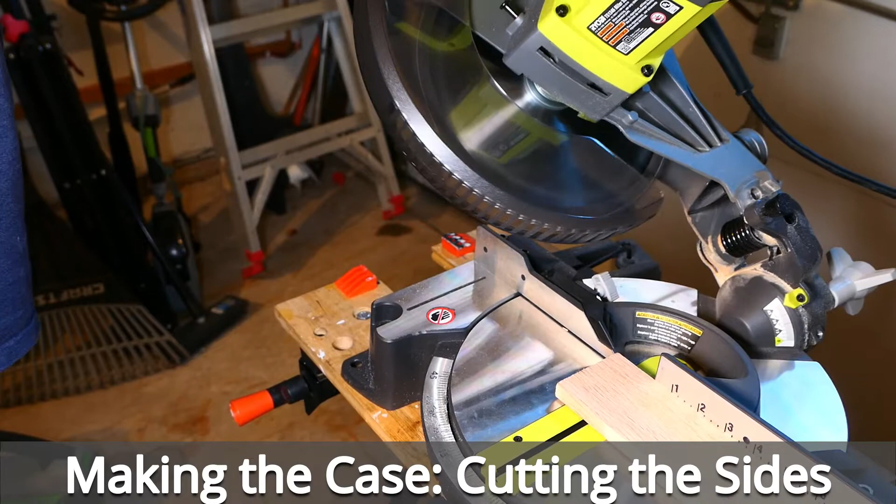So I started off with cutting a frame for the Bayes calculator box. First just do the end cut to get the first 45-degree miter cut. Measured 322 there, along here. And then I used my measurements pretty close to it, to get the bottom of that piece miter cut.

So just ran through the 4 pieces I need to cut like that, making sure they're pretty much exactly the right length for fitting the Bayes calc poster and the panel inside the box. I had about 1mm gap planned on each side of those things, so hopefully I'm getting this close enough that everything fits in.

And then there's one vertical, or 2 vertical cuts to do for the piece that runs across between the panel and the poster.

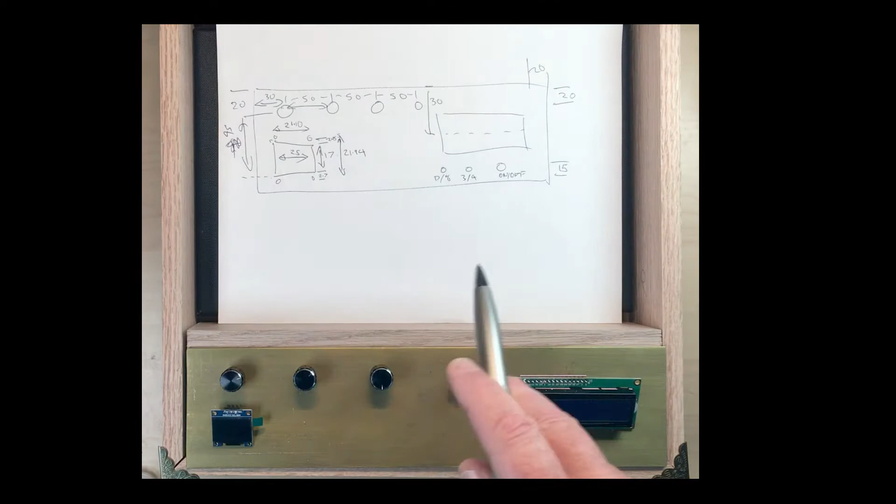Okay, had a better go at working out the layout here, where the knobs go and the OLEDs and the LCD goes. So I got some measurements down here. So 30mm to the first knob, then 50mm between each knob, 45mm from the knob down to the bottom of the OLED should work, and then this worked out about 30mm down to the center of this panel.

It gives me a bit of room, so if I have to cut off a little bit off the edge, I can do that. So the next thing I need to do is start center punching this and drilling probably that hole and work out how to cut out the square hole.

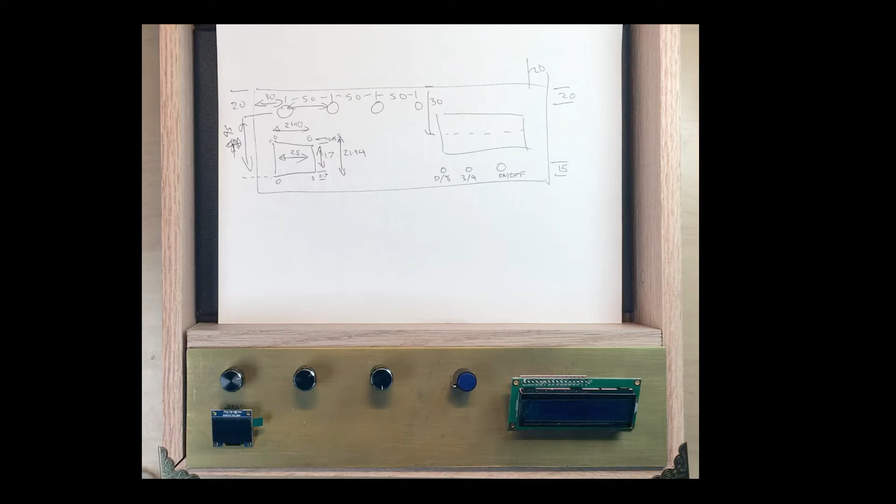I'm probably going to do a 3D print to have a mount in there for that, and also surround whatever I cut out for the hole, because it's probably not going to be absolutely straight. So I'll put a little frame around the hole with a 3D print. We'll see how that goes.

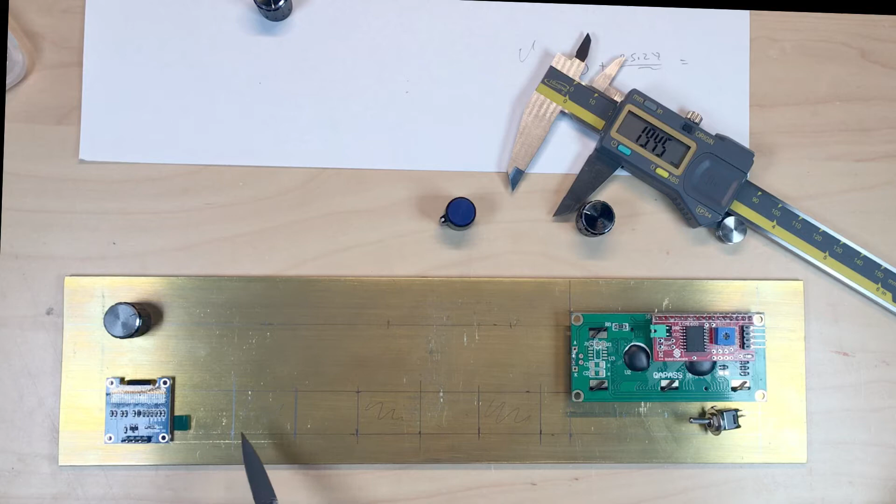So I added some markings here, just used a pencil because I can rub it all off. I'm going to clean up the front of this brass plate, but here's with my 30mm in, 50mm between each knob, and then laid out for the OLED holes.

These scribbled on areas will be ones I cut out, and then the LCD should fit up there and be able to fit at least 3 switches underneath, which I think I'm going to need for setting percentage or decimals, setting it to 4 knob or 3 knob input, and an on-off switch. So I think that there'll be enough room, and then I can cut a millimeter or so off the end if I really need to.

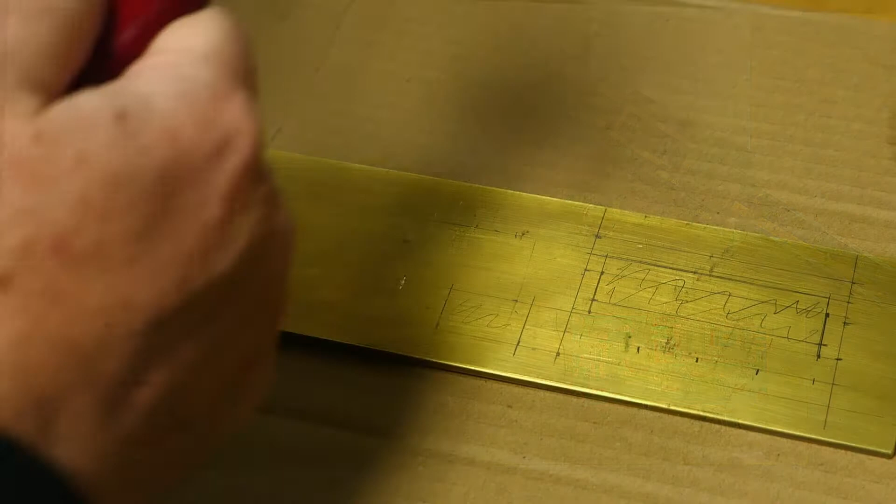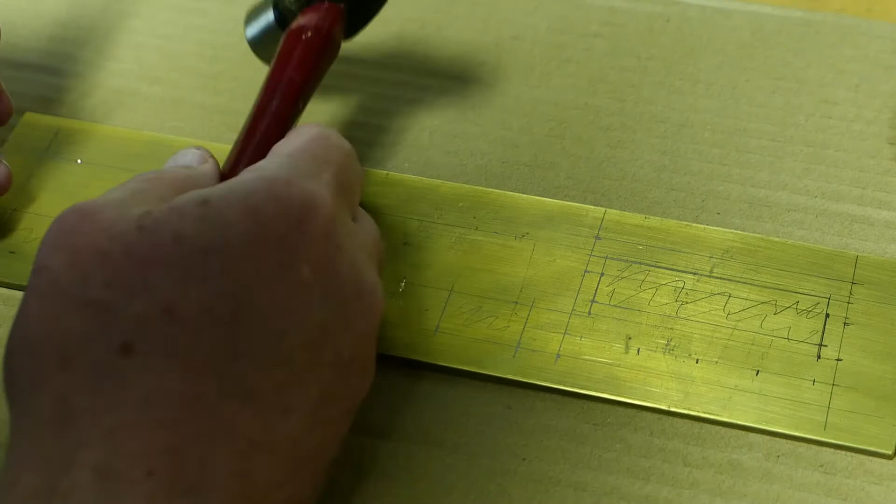Okay, working out how to do the metal work for the first control. So I punched a hole that's the center of the rotary dial, and punched some holes around the edge of where the OLED's going to go. So I'm going to drill out the rotary encoder hole, and then I have to work out how I'm going to cut out the OLED rectangle there.

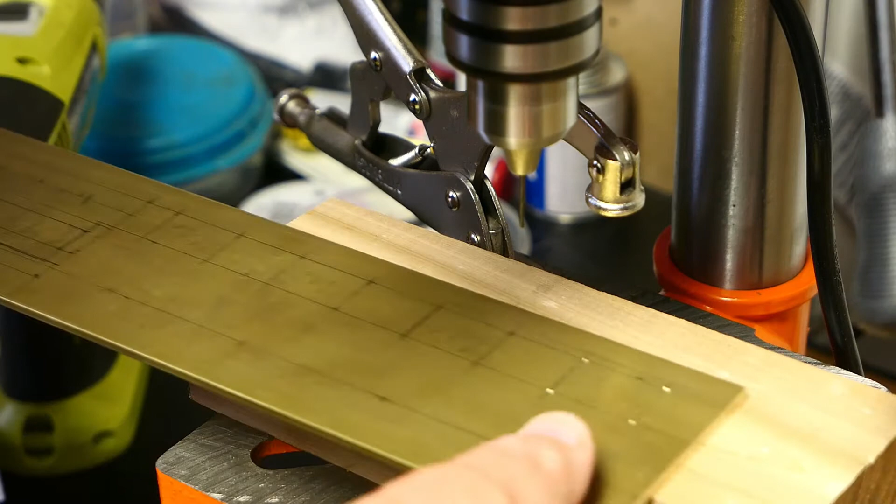I use the drill press for creating pilot holes where those punch marks are. And I went to drill out the large hole the rotary encoder will go through.

Yikes! My drill bit was binding up badly here, as you can see. So I had some offline work to do to work out how to drill a large hole through the thick brass. I found out I had to work through a series of bits, getting larger and larger, to get the hole drilled without it binding up.

I also had to work out how to cut out that rectangular piece for the OLED. I found the best way I could do it was use a Dremel with various cutting discs and cutting bits, and that seemed to work. The 3D print I've got for putting a frame around the OLED covers up most of the worst things I did with cutting out the rectangle, but it's about the best I can do, and you don't really see it when I put it together. So let's get back to the video.

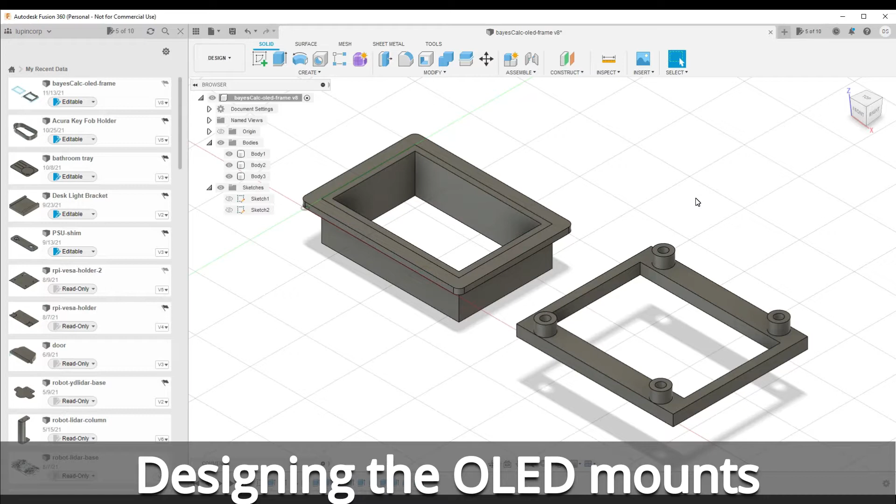Here's the 3D print I used for my OLED mount and frame, and it has this lip around the top to hide some of the bad sanding, bad grinding and things I did. At the moment it's about 1.5 millimeters. I might have to push that up to 2.5 millimeters around there, but you can get an idea what it looks like.

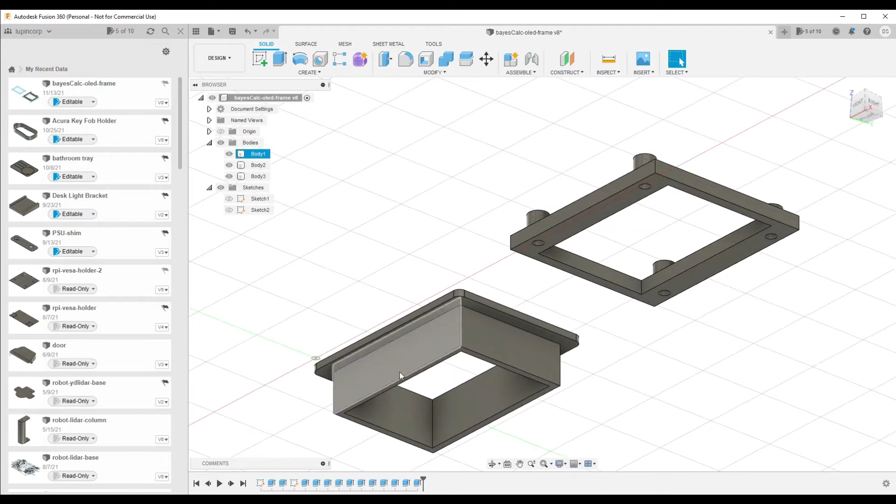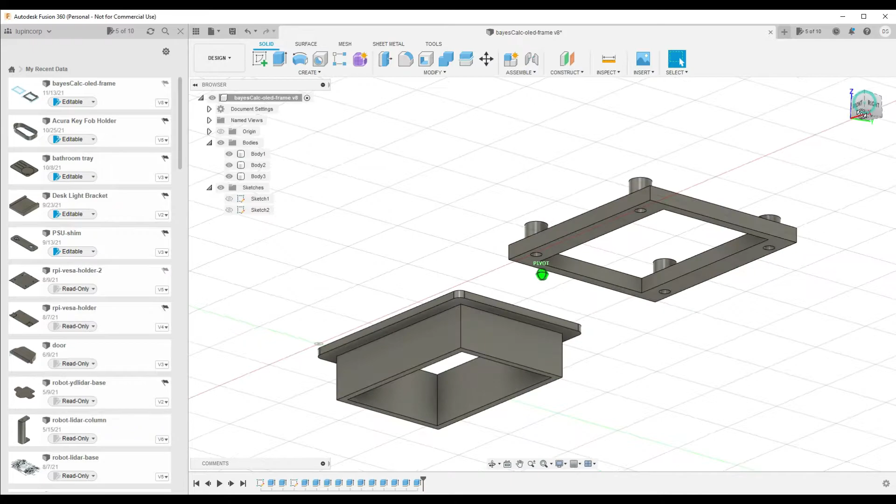This top part is inserted into the panel, and this bottom part is flipped the other way around, but then does a friction fit over this, and seems to fit together pretty tightly. Once I've got this thing almost finished, I'll probably just put a few dabs of glue or something to keep these things together, maybe some Loctite. But that seems to be working okay, and I'll put a link to the Fusion file for this in the description.

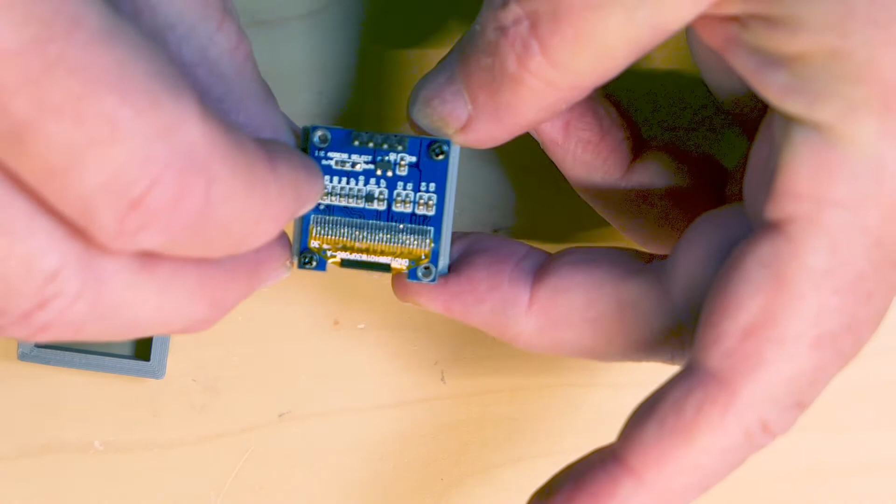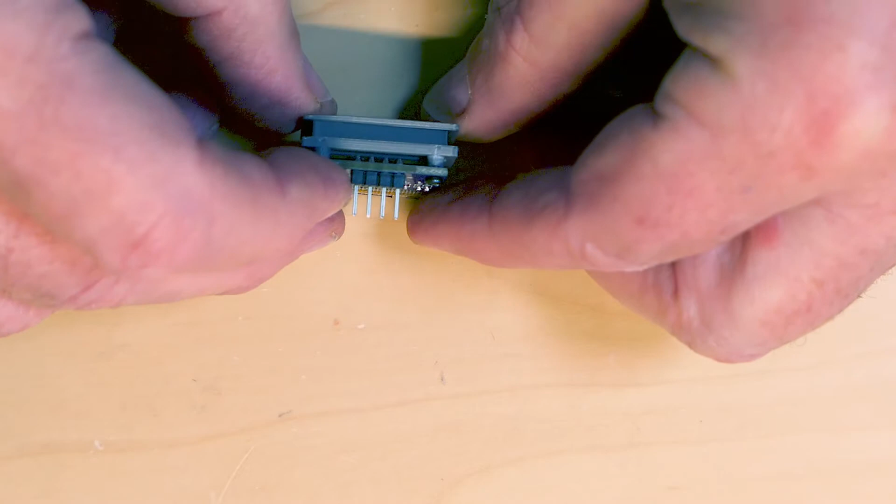So I made a mount for the OLED. It consists of this frame here, and then this piece here that mounts on the actual OLED. I've got some screw holes there for screwing it into the OLED, and then the idea is that it friction fits together like this, and if I want a stronger connection I can glue it to the actual brass front plate.

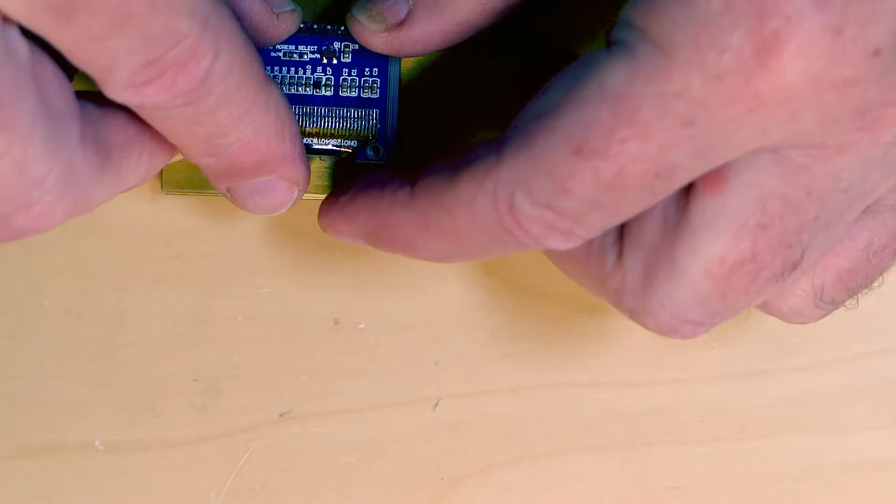Now the useful thing is, even though I've got jagged edges on this cutout here, I can put this frame in like so. That covers up the worst of my jagged edges, and I can make this frame bigger if I need to. Then over here it just friction fits over the frame, and again I can glue it in when I'm finally ready to mount this, but it's in fairly strong and these things aren't going to move anyway.

And there's our OLED mounted in the frame.

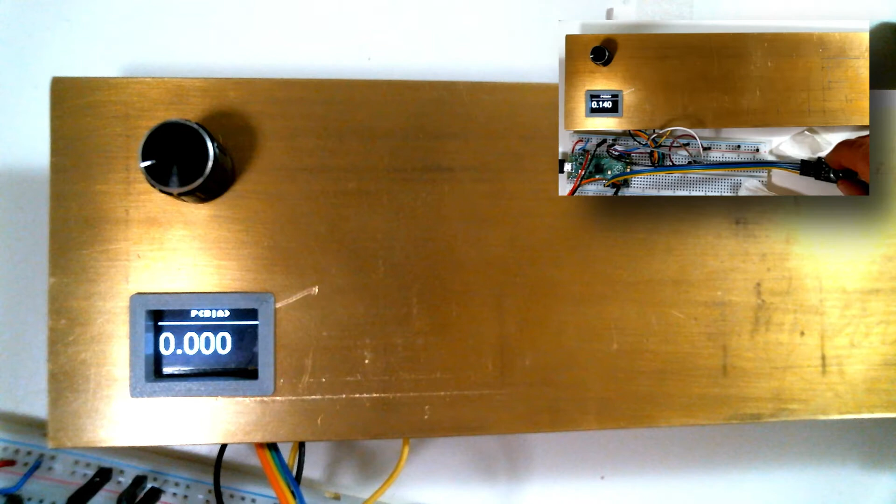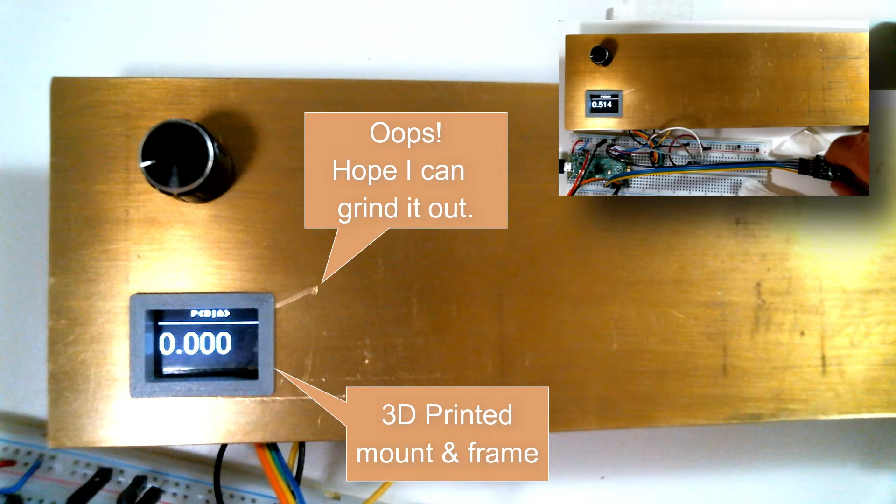This shows what the OLED's going to look like in the actual brass panel. I'm displaying some digits using my MicroPython program. I can see some fix-ups I need to do with some buffing and things. We'll see if that works out.

So I'll show you how I worked out how to drill out and create the square for the OLED. First I punched placeholders for all the holes I'm going to drill. I'm actually going to drill more holes this time. It'll make it easier to cut out the rectangular piece.

Now I'll use the drill press to drill out all those punch marks. Doing these small holes, the drill press had no problem lining up at all, so I can get through this fairly fast. I'll speed this up.

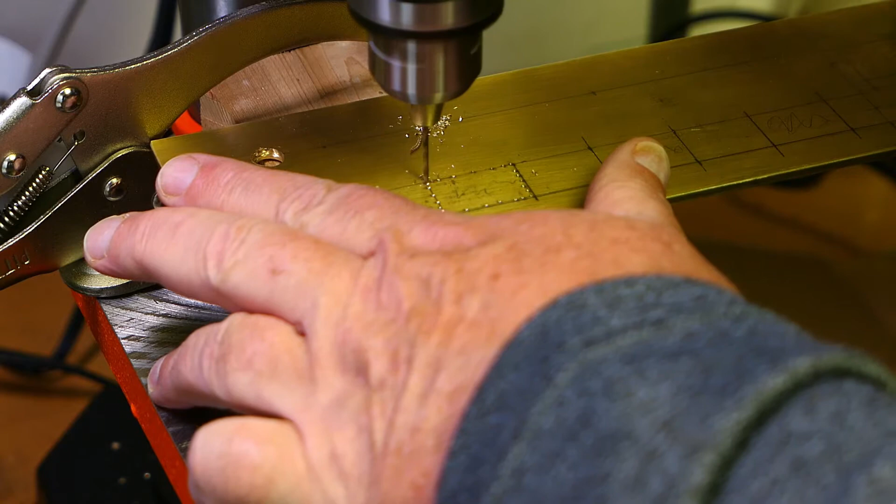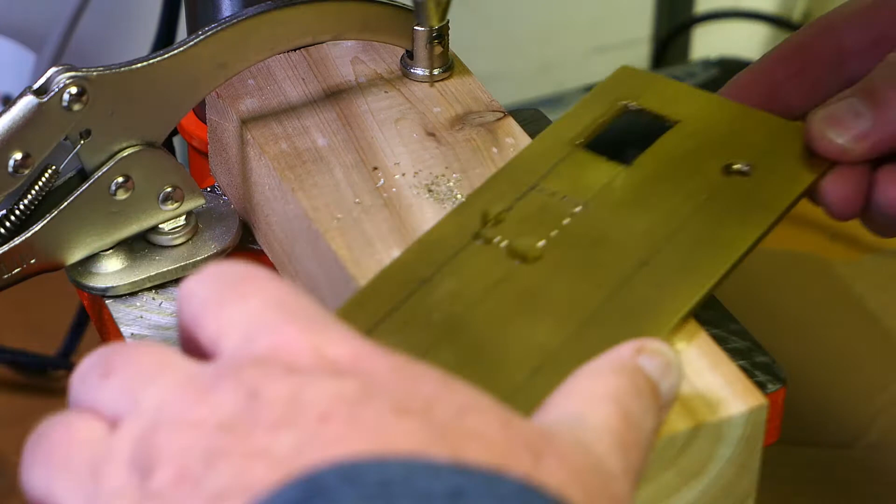I also wanted to try this with some drilling oil, to see if it made a difference, if it made it smoother. Here we go with the oil in place, and I'm drilling through that. It made it harder to actually see the punch marks, so I had to wipe things away quite often. But I think for the small drill it didn't really make much difference.

Now let's try drilling the larger hole for the rotary encoder. This is the one that kept binding up before. So I started with a 1/4 inch drill bit. That seemed to go through fine. I put some oil on there. Then I started using larger drill bits.

This method worked better, but I think I still have to go through more drill bit sizes. I found if I jumped a couple of drill bit sizes it would bind up again, and in the big picture it didn't make a lot of difference. My hole was still round enough to put the rotary dial in, and then it gets covered by a nut anyway, so you don't really see that I went off center a little bit. But I think next time I'll run through a lot more bit sizes, so hopefully you can avoid the binding up altogether.

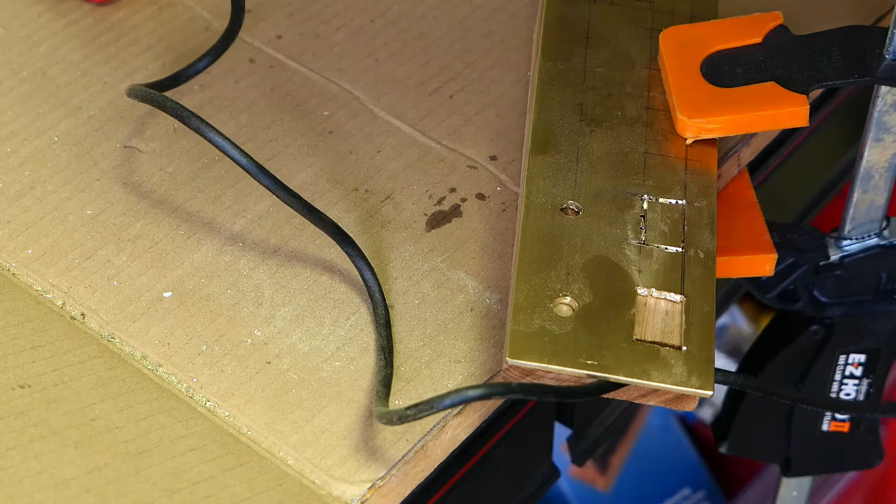So I use this cutting bit first, doing it from both sides. It cuts the majority of the metal away that I want, and then I use this little bit - I think it's a diamond head bit. It looks a bit like a dentist drill, but for the thin piece of brass I've got left, it cuts through nicely, and I can quickly run through and get rid of the remaining brass bridging the pieces there.

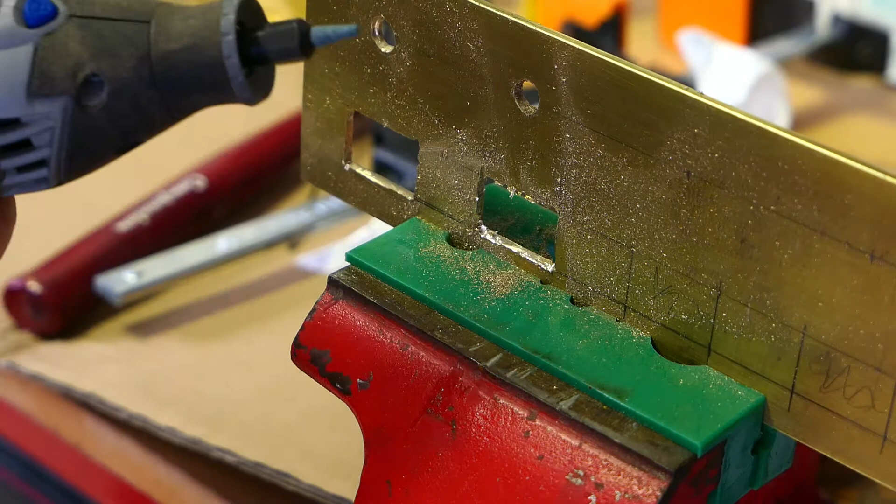Only unfortunate thing is it's not a perfect cut down the side. You see you've got dents and things where the drill holes didn't line up, or the Dremel bit didn't get it totally smooth. So I tried using this grinding bit in the Dremel to see if that helped smooth things off. It didn't really make a lot of difference, so you'll see later I actually just changed to a file to straighten up the edges. But again, with the 3D frame, most of my sins get covered up when I put that frame on there.

So here's a test fit. Didn't quite fit the first time I put it in. So I'll file away some of the jaggy bits with the file. It seems to line things up better, and gets rid of the worst of the stuff that's sticking out.

And now when I put the OLED frame in, it fitted fairly nicely. And now it'll be tight once I put the friction fit back mount for the OLED in there.

So you may have noticed that using the Dremel and drilling holes and filing out holes wasn't that accurate - at least I wasn't that accurate with it. It helped that I had the 3D frames to sort of hide some of the bad cutting. Probably if I did this again, I'd look at using a milling machine to make these cutouts. But milling machines cost a lot of money, even a mini mill, so it's probably not worth it for this project. But if I find I'm doing a lot of these, then a milling machine is probably the way to go to get these accurate square cuts into thick metal.

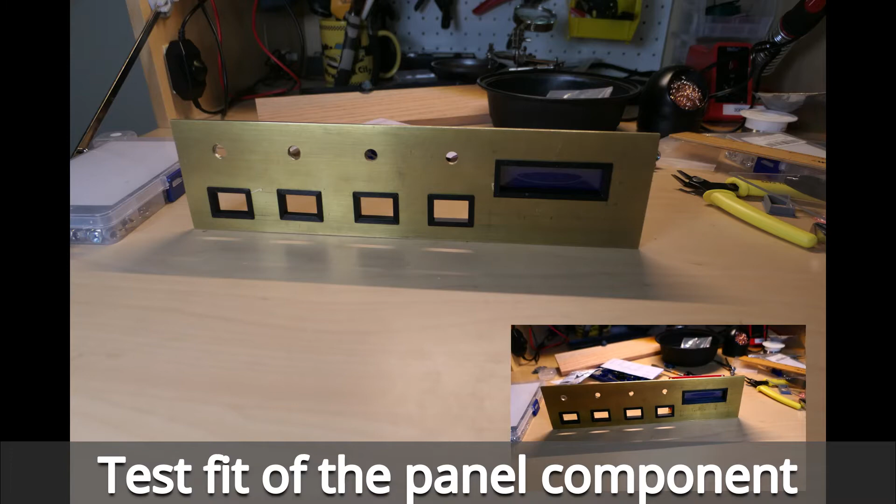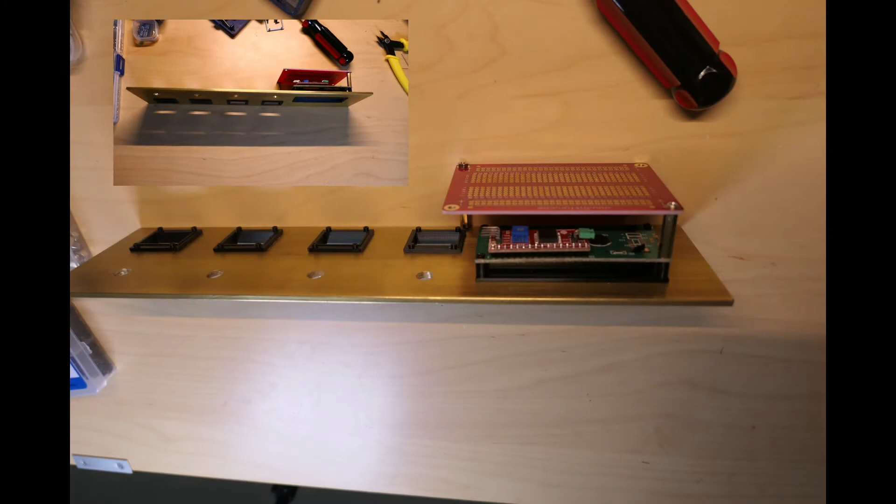This shows what the panel looks like. Now I've printed out all four of the OLED and LCD frames and mounts. I did them in black - black seems to look better. And then you can see here where I've worked out how I'm going to mount the PC board on the back for the Pico microcontroller.

After I did this, I had to clean up my workbench. The good thing is just water removes this wood glue. I was making a bit of a mess at this point.

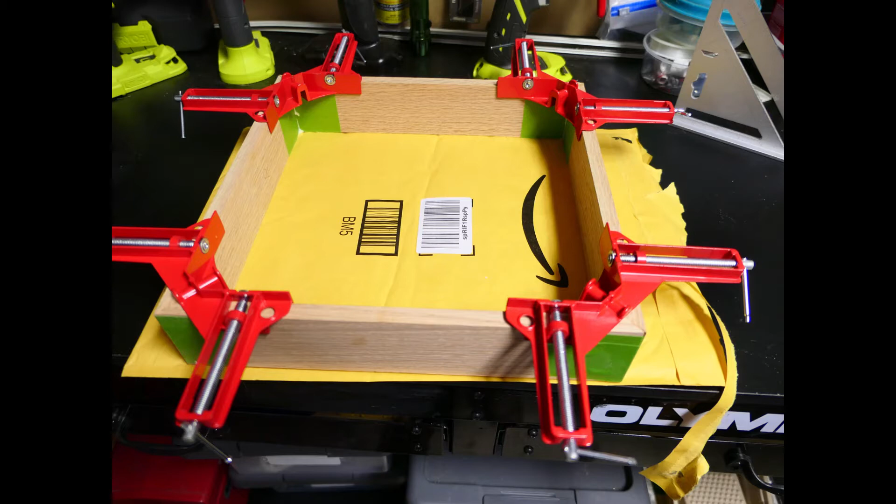And here's how I left it overnight. So I cleaned up the glue and could just leave it here to set for 24 hours. It should be fairly strong at that point.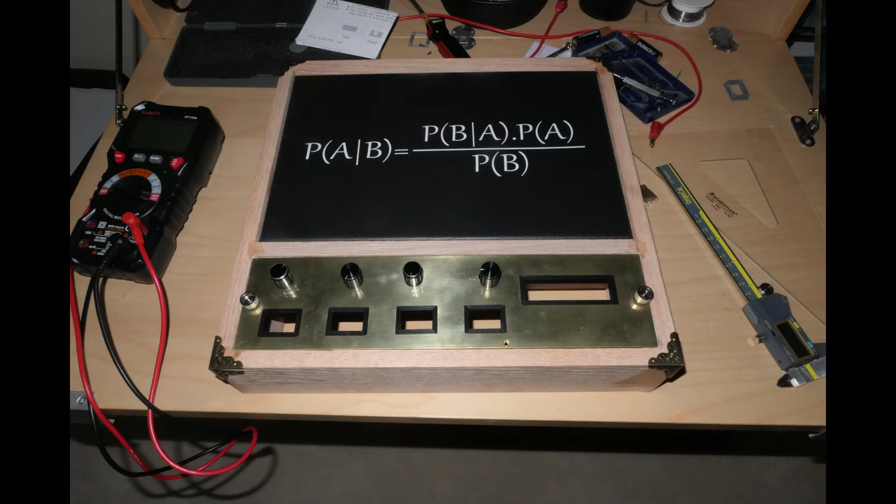Okay, we're getting closer. I added some switches, so there'll be one for the percentage or decimal display, one to switch between 3 inputs or 4 inputs, and this will be the on-off switch. Here's the varnished version of the case.

Okay, I want to mount all these rotary encoders first. I'm going to hardwire the ground and positive lines together, so there'll be 4 of them up here. I'm going to organize these by having a spring washer at the back just to be able to tighten it pretty well. Then on the front, I'll just put a normal flat washer, and then a nut, and that should hold it in place pretty well.

So I just tighten that up, and I don't think it's going to move once the spring washer does its thing. Okay, so I put the rest of the rotary encoders in.

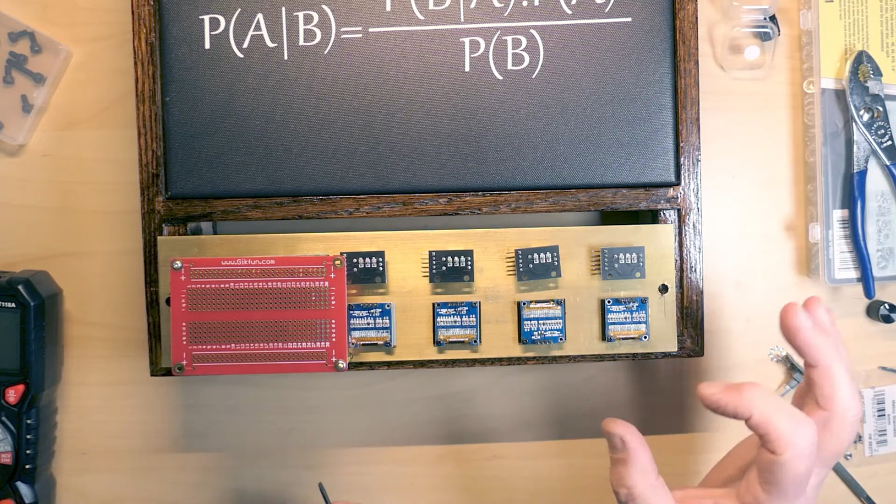I also put the OLEDs in, so remember they're just like a friction fit frame there. I'll probably tighten them down, put some Loctite or something to actually put them in there firmly, but for now that's okay.

I mounted the board where it's going to go. That's going to have the Pico controller in it, and then switches and the other OLED LEDs in there. And then I just wanted to check everything still fits in the case here.

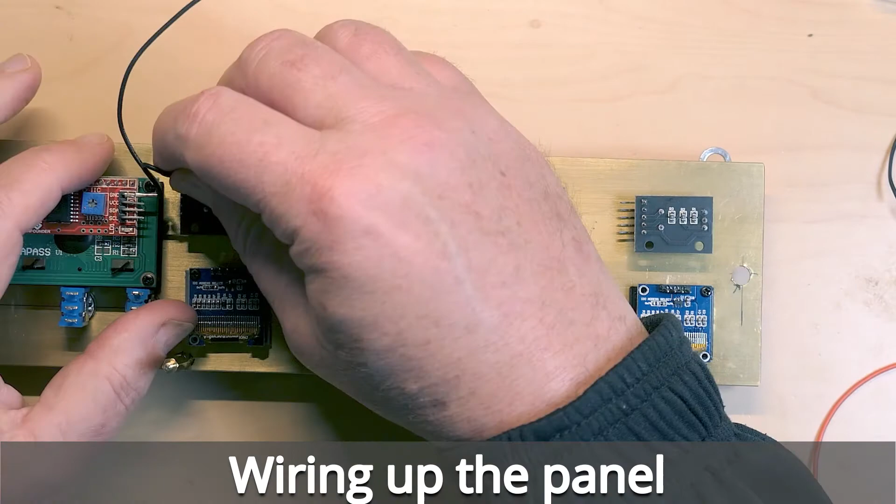I started wiring up the panel. I had some heat shrink over these connectors later on so they didn't bang into each other. And these are the main power rails, the positive and the ground rails.

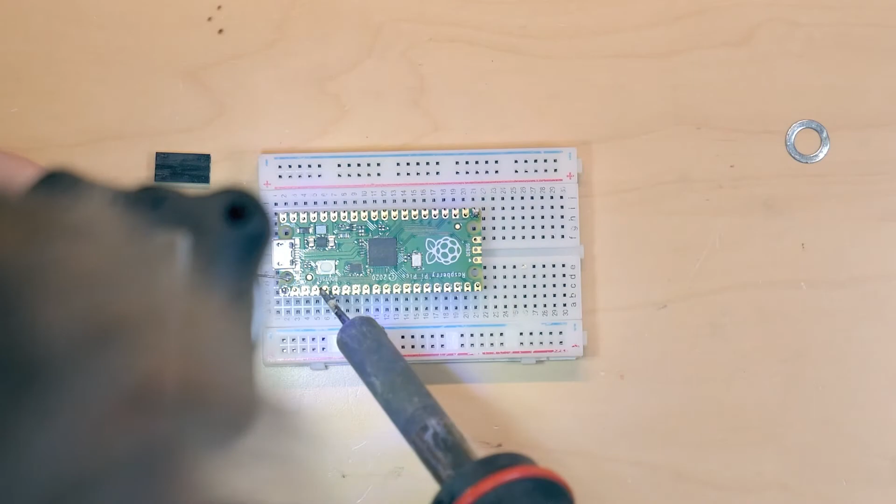I added header pins to the Pi Pico, and then I soldered a header socket onto the PCB, so I can just plug in the Pi Pico board.

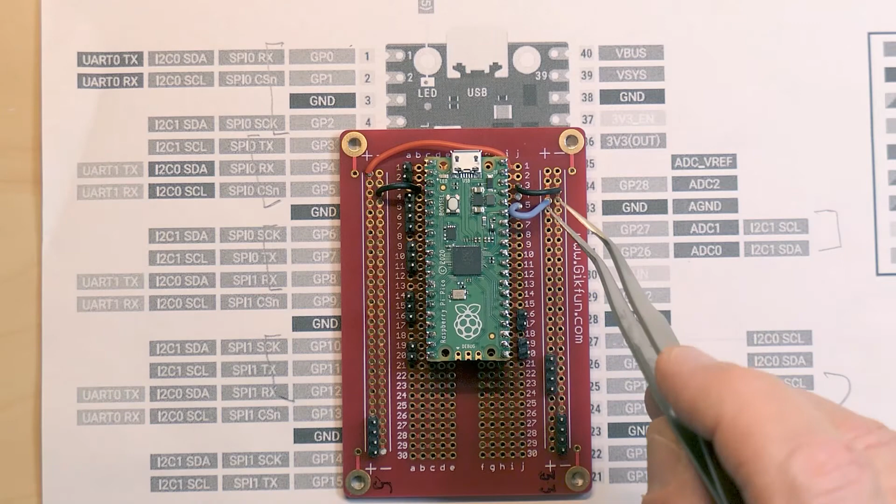Okay, I soldered in extra pins, so I soldered up the main rails here, so ground I've got going to the negative rails here. Positive 3.3 volts goes to this rail, and positive 5 volts goes to this rail, and I put 4 pins on each of them to distribute to the OLEDs and rotary encoders.

And then I put all these pins in just following this, so I need 3 pins for each of the rotary encoders. So 1, 2, 3, then another 3 here, another 3 here, another 3 here, so they line up down here. I got 2 extra pins for connecting to the switches that switch between percentage and decimal, and the other switch that switches between 3 and 4 parameter input.

And then these 2 sets of 2 pins for the I2C buses 0 and 1, and everything should be able to plug in there. Haven't done much to the actual Pi Pico other than mounting it, so we should be good to go. So this shows you the wired up main panel, and at least the OLEDs are working fine.

So now I need to get the rotary encoders wired up. This should be all the wiring. One of the encoders wiring got a bit cramped, but fitted it in the end.

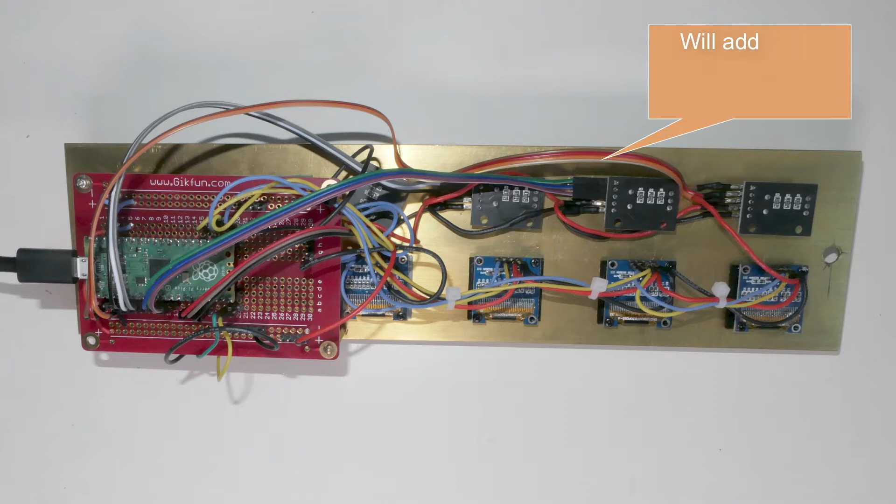I wired up the switches for the percentage, decimal view, and the 3 or 4 input selector, and I'll add some more cable ties. Let's have a look at the code.

I'm not going to go into the detail, I'll just go through the top level program. Some more details in that first video associated with this. So the first thing, I moved all the test code

into main.py so that when the actual board gets powered up or when it gets turned on, this code just runs automatically. We've seen a lot of this, but I've set up 2 instances of I2C buses.

I need 2 buses to be used because I've only got the choice of 2 addresses for the OLEDs, and to be able to run 4 OLEDs I need to be able to run 2 on one bus, 2 on the other bus, to be able to use the same address for 2 of them.

And then I also set up the LCD, which runs on the first bus, because it has a completely different address from the OLEDs, that can run happily on that bus.

I set up the OLED objects by using the SSD 1306 library. Again, we saw that in the earlier video.

I need 4 sets of OLEDs and rotary encoders for entering the parameters. You can see here for the Bayes formula, so one represents probability of B given A, next one is probability of A, and the third one is probability of B, and then the second option is the 4 input formula,